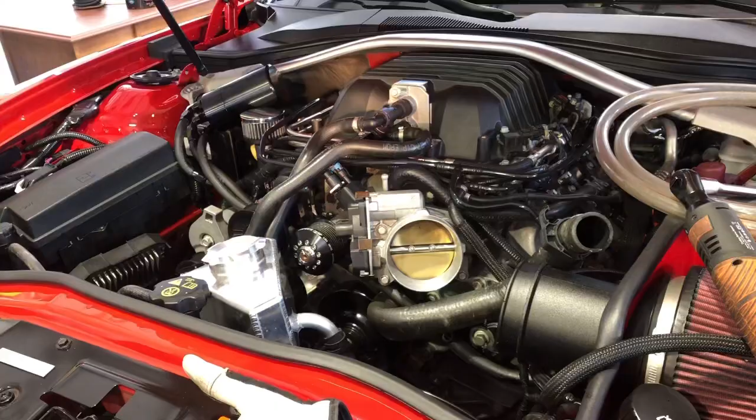Doing a little bit of minor work. So right down there, that tan color thing, my cam sensor, I've got it disconnected from the harness. Luckily, those can be had without taking the water pump off. I did have to drain the coolant to get the radiator hose out of the way. But that thing's super loose in there.

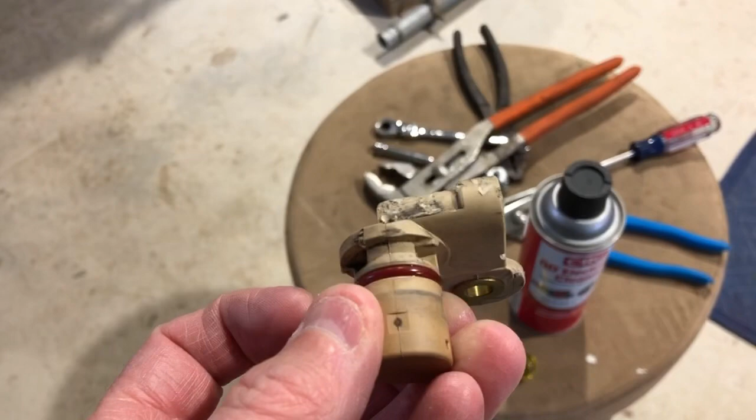I think I'm leaking past that O-ring because the wiring harness was just covered in oil, man. Just covered in oil. So I did get the sensor out. And when you take yours out, there's a part number. You can't really see it very well, but there it is, 12591720. That's for the ZL1. Might be the same for the SS. Might even be the same for the Z28. I'm not sure about that.

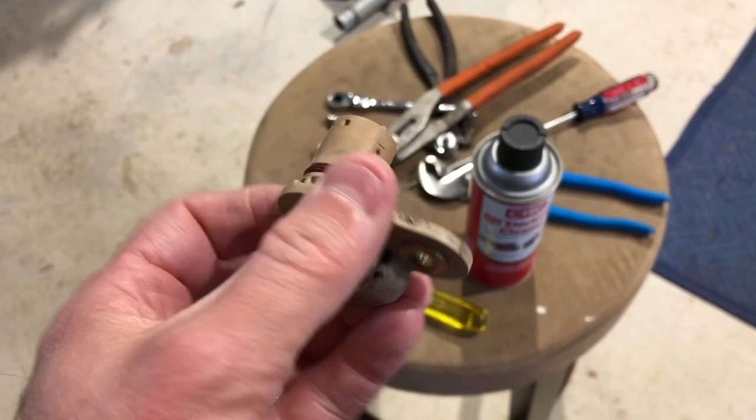Anyway, this is kind of chewed up because even though it was pushed into the timing cover, I could spin this easily in there. But as soon as the O-ring got past the cover, you can see the dark band here. It was hanging up on the timing cover, and I had to grab a pair of channel locks with both hands and wiggle that thing out of there. It took a little while, but I got it out.

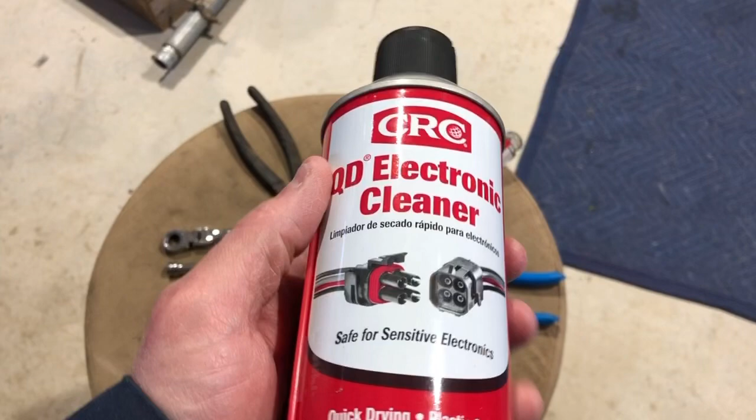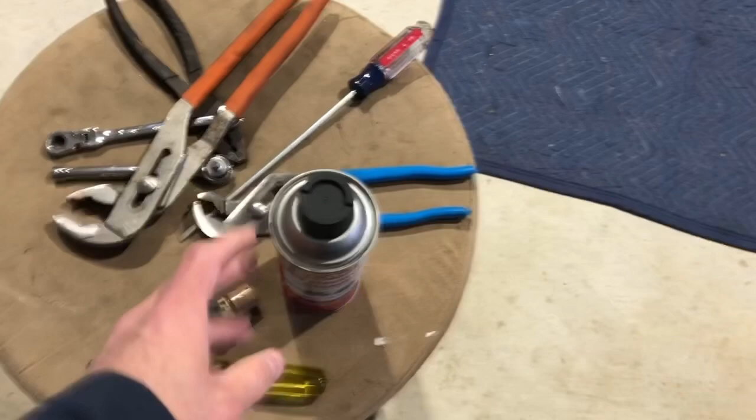And now I'm going to clean the contacts that are covered in oil with this stuff, and it's plastic safe. Don't use brake cleaner because it'll probably melt the plastic or expand the rubber on the connector. That weather pack type seal, brake cleaner will just destroy that. So you don't want to use brake cleaner.

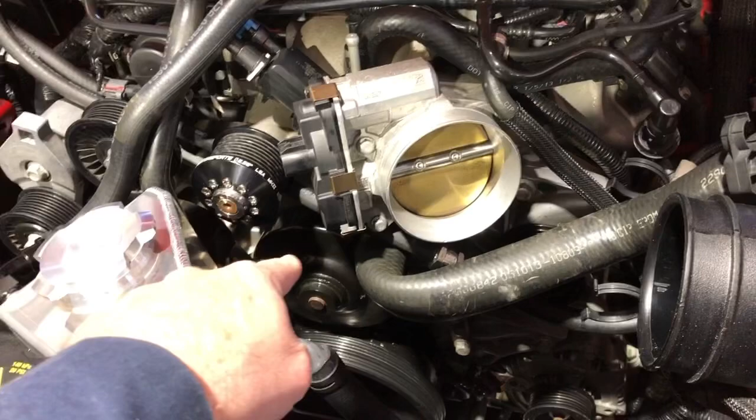My battery just went dead on my flashlight.

Anyway, I wanted to show you a couple tricks, so it might save you a little bit of time. Well, here's the new sensor and the bolt for it. So when you take this bolt out, it's actually going to loosen up the top half of the harness. And let me show you that harness.

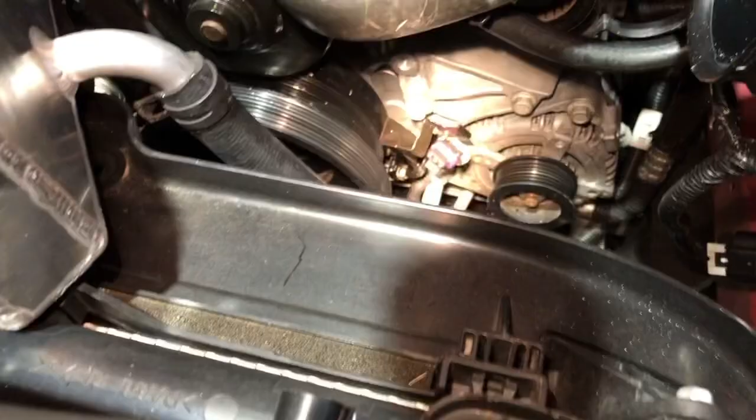Forgive me, I don't have my GoPro. I'm having to film this on a potato.

Anyway, that's the harness and the metal bracket. Now, in order to get this metal bracket out of the way, you can see it's really loose. There's a bolt on the bottom, and you don't want to take it all the way out. You just want to loosen it. You're not going to be able to get to it from the top very well or at all. So I did it from the bottom, so let me show you what that looks like.

All right, so here we are under the car, and you can see that bolt head right there, and then this greasy, oily harness. That's the other end of the metal bracket that goes up to the sensor. It's going up and around the damper and connecting and bolting to the cam sensor up on top.

If you loosen this bolt, just leave it in, loosen it enough so that this whole bracket holding the pigtail can swing out of your way up top, and that'll give you the room you need to get to the sensor. If you take that bolt out, it's so close to the damper, you might have trouble getting it back in. But it's real easy to reach with that flex head and a regular open end wrench to tighten it up. So that's a tip for the day.

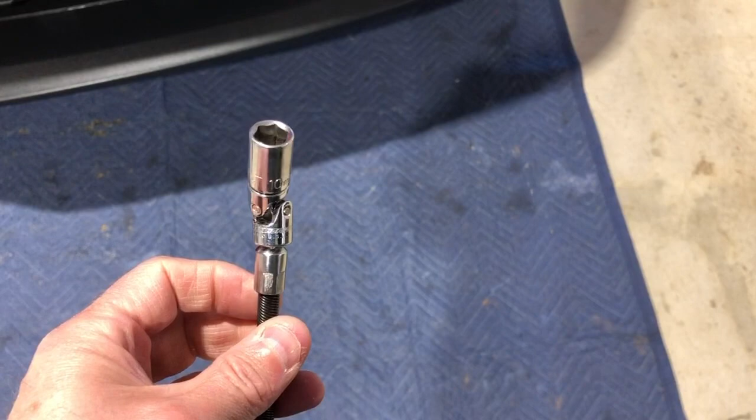So this is what I used to get the bottom bolt out. You can use a ratchet with an extension. I didn't need this flexible part because I had started the bolt already. I broke it loose with the regular wrench, but the flex head did help.

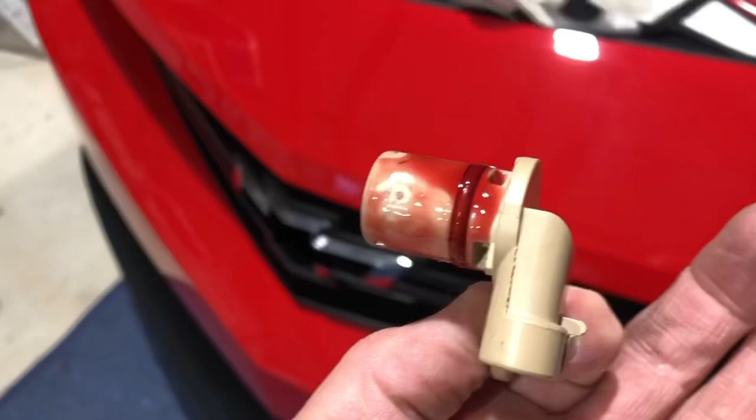So alright, I got some engine assembly lube on there. You can use engine oil. And I'm just going to put that right inside the hole, push it in, and then get the bolt and the bracket set up, and I'll show you that when it's done.

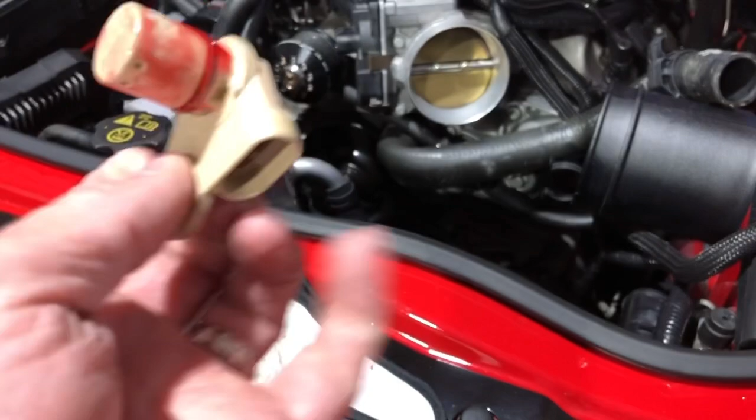Sorry I have to use kind of a crummy camera, but that's my phone and I can't hold the phone and do this all at the same time. So sorry it's not the greatest video, but you'll get the idea hopefully, and hopefully something here can help you out.

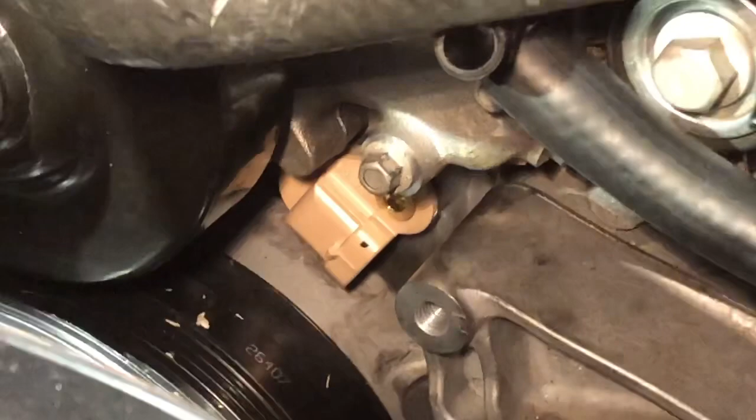Well, that thing went in way easier than the old one came out. The old one must have been swollen or something wrong with it. That just popped right in, and hopefully everything's good with the O-ring. We're going to go ahead and clean that up with the electrical cleaner, degrease it, and then get that bracket back on and put the 10mm bolt in. And I'll show you what the torque specs are as soon as I get done with that.

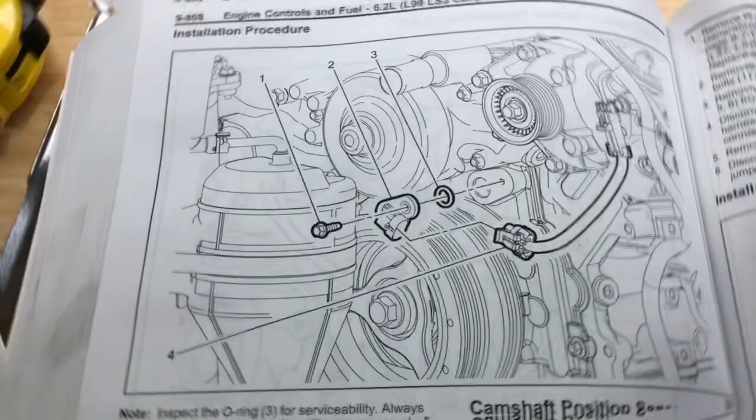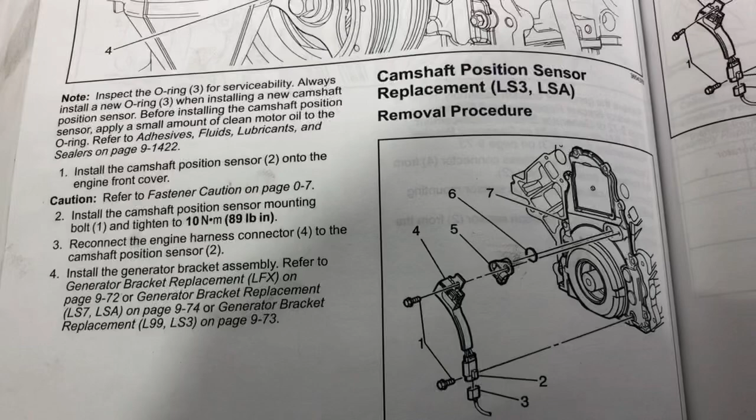I don't know why the service manual does this. It gives a picture of an engine. This is actually the 7-liter LS7 engine. You can tell by the canister here. This is pretty much the instructions for removing this. This is that bracket I was telling you about.

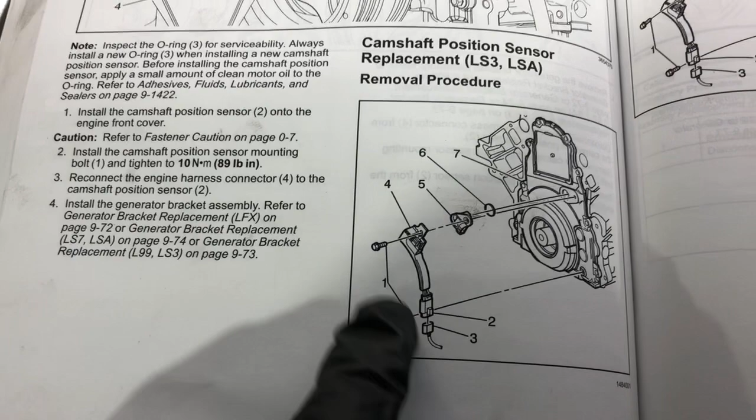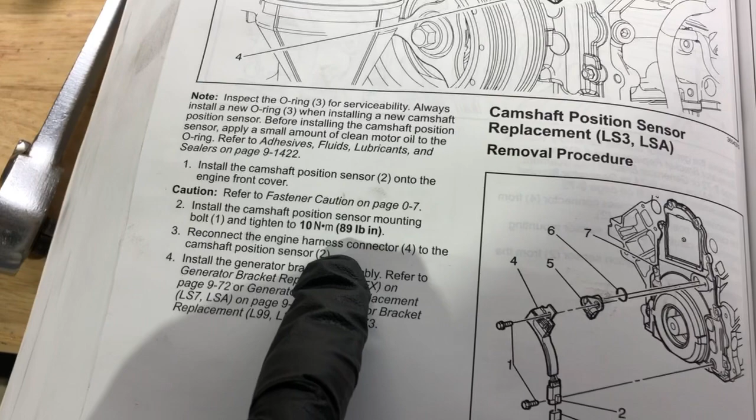That's the bolt I was saying to leave in that I showed you in the video. We got the sensor in, and the O-ring comes with the new sensor when you buy it. These two bolts torque down to 89 inch-pounds, not foot-pounds, that's 10 Newton meters.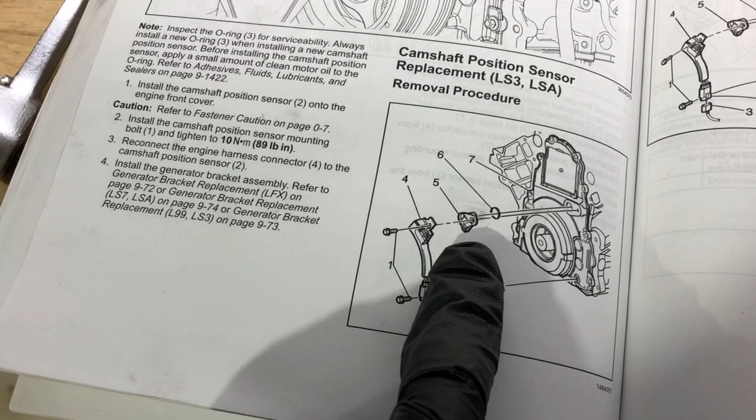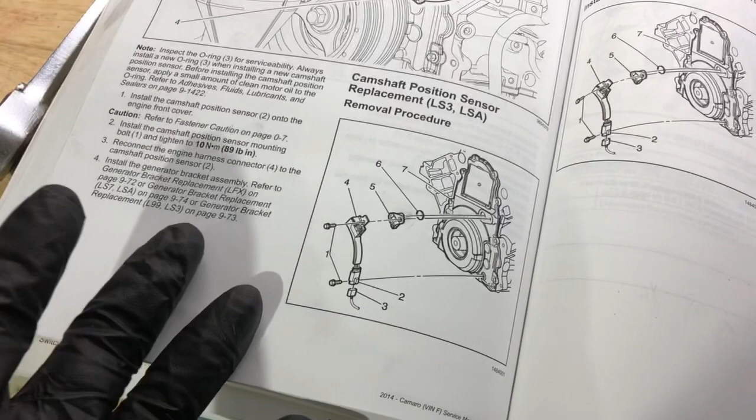We're going to tighten that one, and I'm going to crawl back underneath and tighten this one down with the flex head and then the open end wrench. I can't really do that and hold the phone, so sorry about the crummy video, but I wanted to point out how easy it is to do this sensor. You don't have to take the water pump off or all the pulleys off. It was actually easier than I thought.

I'll show you some of the installation when I get some of it reassembled.

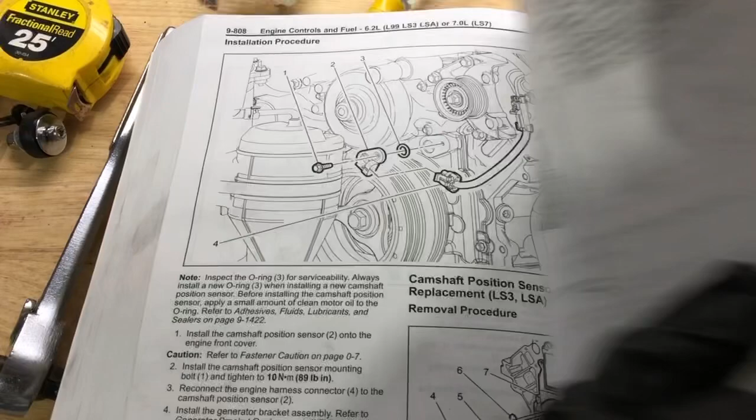So the bolt is tight. I just did that one hand tight because I can't get a torque wrench on it. And we cleaned up the electrical connector and tightened that bolt.

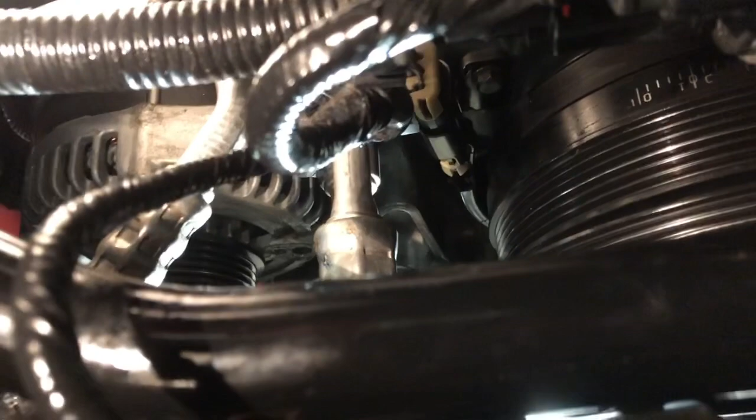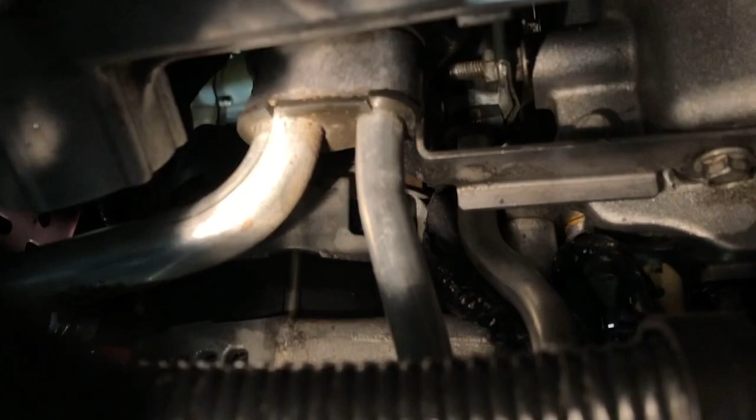I did want to show you guys something else. When I did my cam, I noticed that underneath the alternator, let's see if I can move over here where you can see it. It's going to be really hard to see, but yeah, you can kind of see it. Right there, that black split loom, you can see the friction tape I put on it.

This cooler line right here, let me see if I can get this to focus a little better. That cooler line rubs that wire loom. Sorry, it's really difficult to get this shot. Right there, you can see the friction tape I put on it. It looks like it's pinching it, it's actually not, but that is how GM put that wire loom through there.

And it will rub through. So if you ever have your alternator off, or if you're OCD like me, you can take it off and you might be able to reroute it. I don't think there was a way for me to do it, not sure at this point, that was 1.5 years ago. But anyway, just to let you know, that is a point that can rub through your harness, so you might want to look at fixing that.

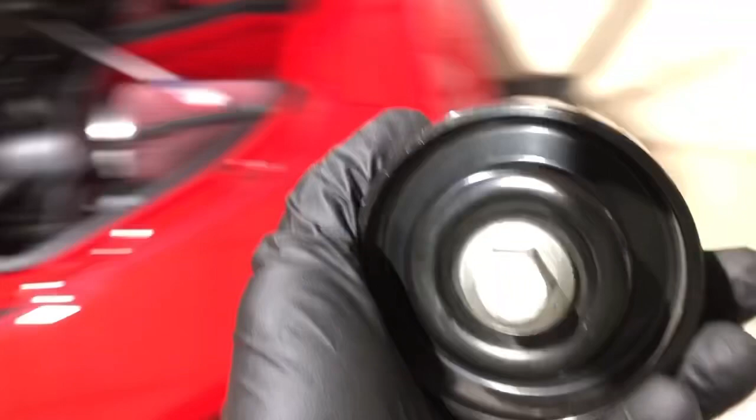Well, the car is safely on the ground. Got our jack stand out from under it, jack is down. I'm going to put this back on, and that is going to get torqued to 33 foot-pounds. That's the idler that we took off. So we're going to put that to 33 foot-pounds and start getting belts and hoses back on.

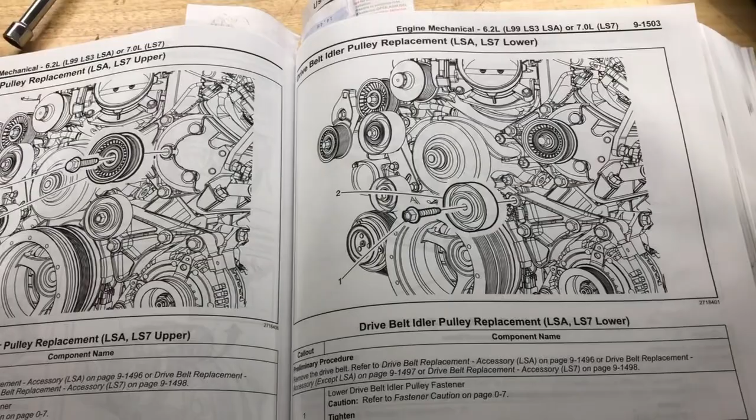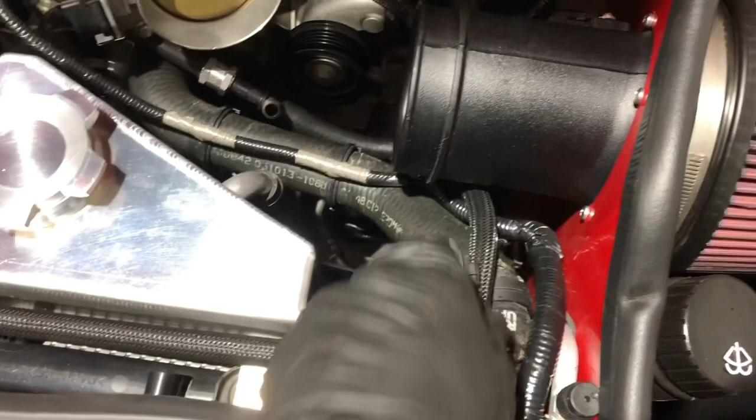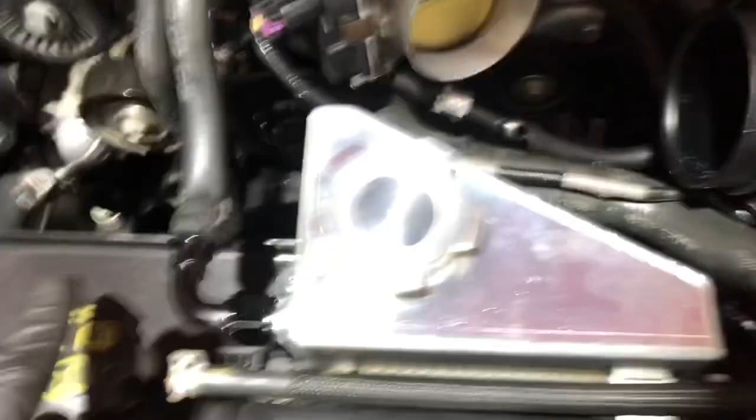We connected the radiator hose, and it's not really the overflow, it goes to the cooling system on the engine. And then reconnected the supercharger coolant reservoir, which I never drained, by the way, I just moved it out of the way. We're going to reconnect the catch can over here to the radiator mount, and then just button up the hoses back to where they were, the little clamp here, put the belts on, and then put the intake on. I still have to put the elbow here and get this connected, and then fill this with the coolant from that. That has only had brand new coolant in it, and it was rinsed. I'll filter it before I put it back in the car.

And yes, we did tighten up the petcock at the bottom. Nothing like having coolant run all over the place. And that hopefully will fix the leak.

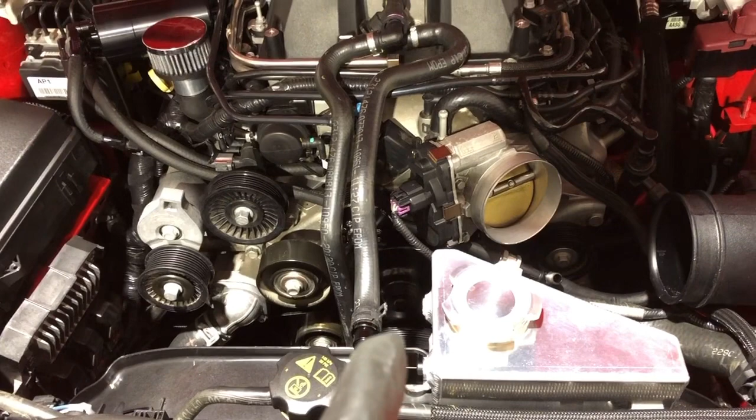I've been fighting this leak for a while. Thought it was the crank seal. Replaced the crank seal when I did the cam. Replaced it again because of the leak, and then it still leaked. Replaced it again when I put the 10% overdrive pulley on. Still leaked. Three seals, that's not the problem. Hopefully that'll be it.

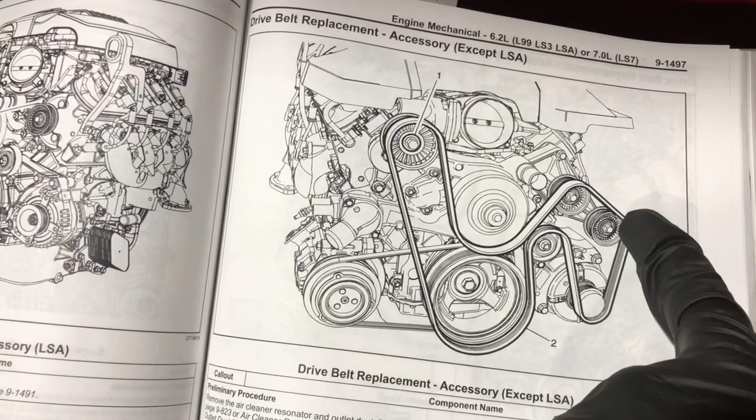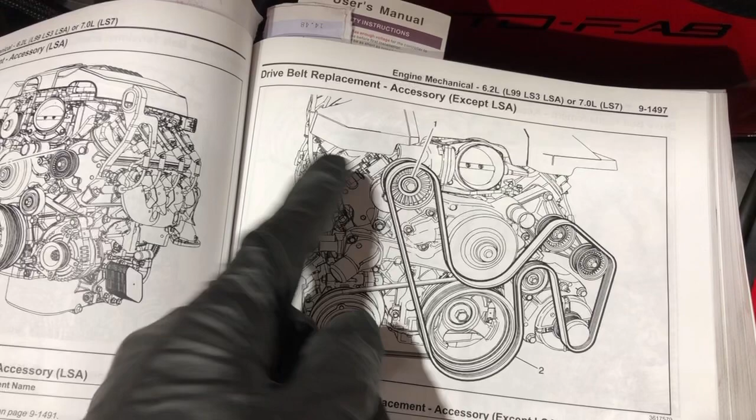This is a picture the manual gives you for replacing the belt. Not a very good one. This is better, it's not exact, but we don't have this pulley. If you just run the belt straight down to the alternator, that's it. This is your tensioner, so you're just going to turn the bolt that way with the ratchet, and this will rotate down and you'll be able to slip that belt over.

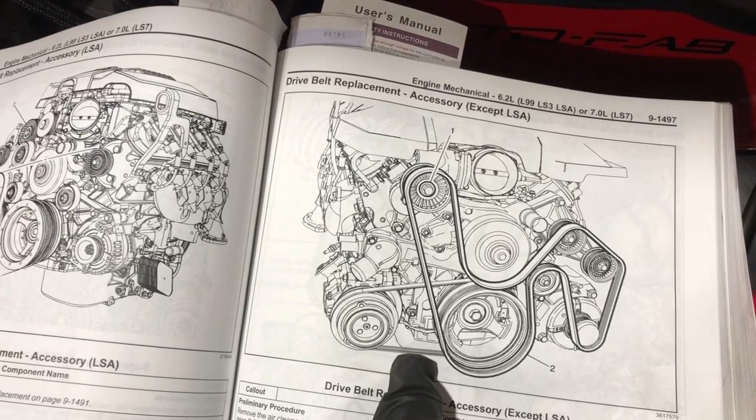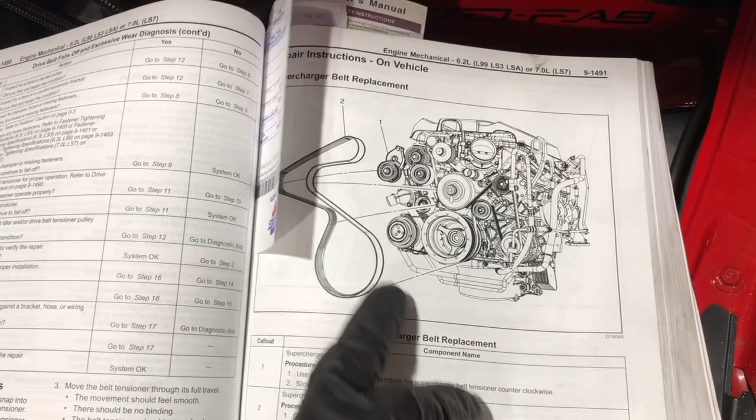It is pretty tight. Hopefully you didn't take off the air conditioning belt, because that is a stretch to fit, and those are a pain to get on and off. Actually, getting it off is easy, you just cut it. The supercharger belt isn't difficult to put on. I'm sure if you got it off, you can figure out how to put it on. It's really simple. Anyway, that should be it for that.

We're going to put the air tube back on, and yeah, we'll be done. Fill it with coolant.

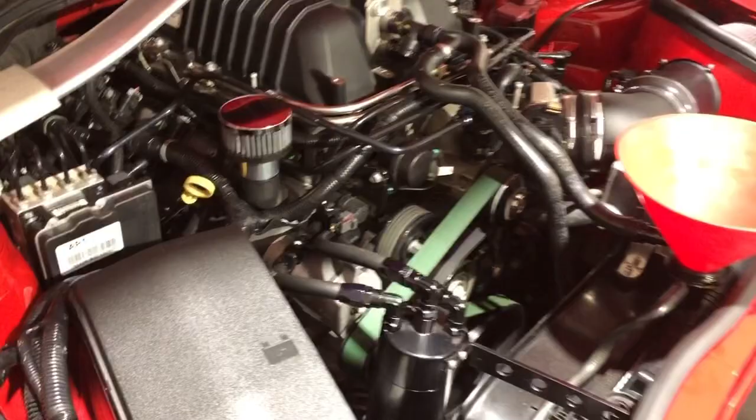Well, it runs, so I guess the cam sensor's working. Just going to finish topping off the coolant. After it warms up and burps all the air out, put the radiator cap on, we're done. Hopefully it gets rid of my leak. I'll let you guys know in a future video. Have a good night.